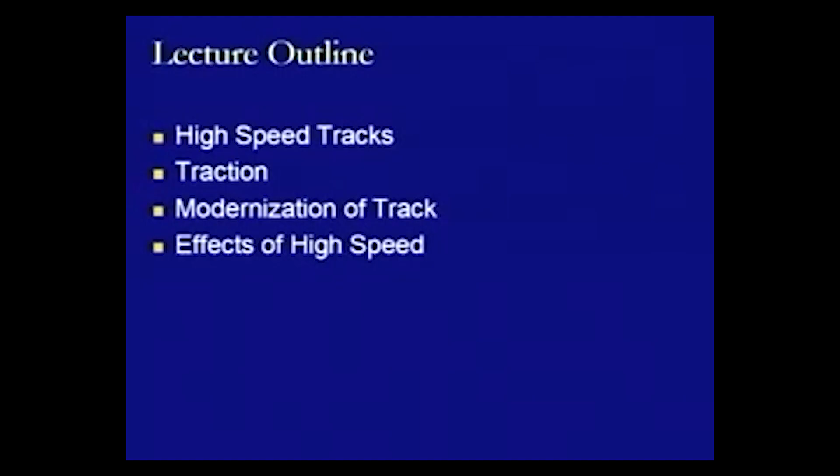We will also be looking at the different limitations which arise and limit the speed of the trains on the track. This lecture is outlined with high speed tracks, traction, modernization of track, effects of high speed, limitations on super high speeds, and further certain concepts of super high speeds.

So, we are starting with high speed tracks. These are the tracks which allow operation of trains at speeds more than 120 kilometers per hour. These are the requirements of today because there is a rapidly increasing demand of transportation. The running of heavy loads at faster speeds safely and economically is another requirement between the two major terminal stations.

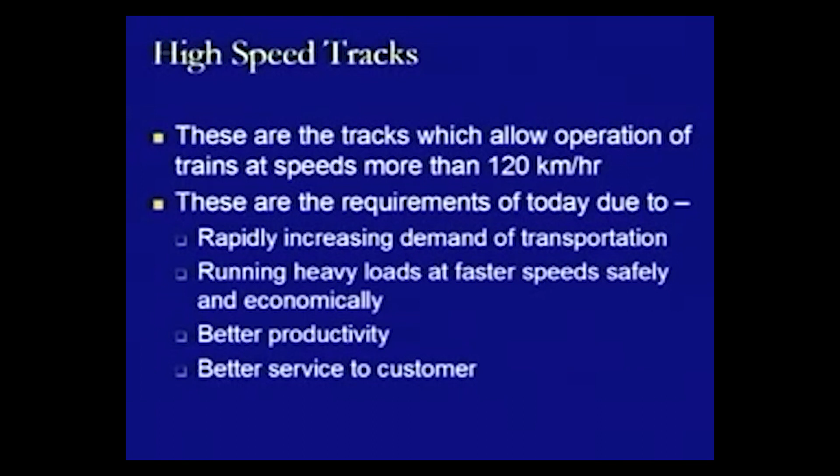It is also associated with better productivity, and it will be possible to provide better services to customers if they can be transported, or the freights can be moved, at a higher speed.

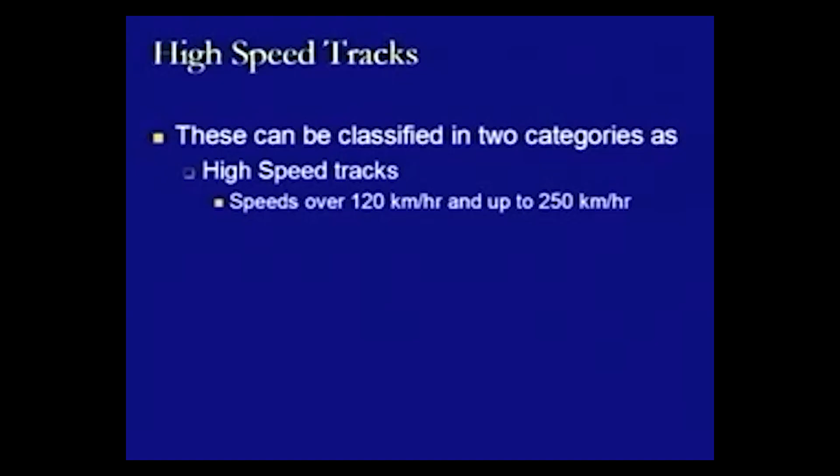High speed tracks can be classified in two categories: high speed tracks where speeds are over 120 kilometers per hour and up to 250 kilometers per hour, and super high speed tracks where speeds are above 250 kilometers per hour.

The development of high speed and super high speed tracks requires modified traction, like diesel and electric traction instead of steam traction, and the modernization of the present track to higher standards.

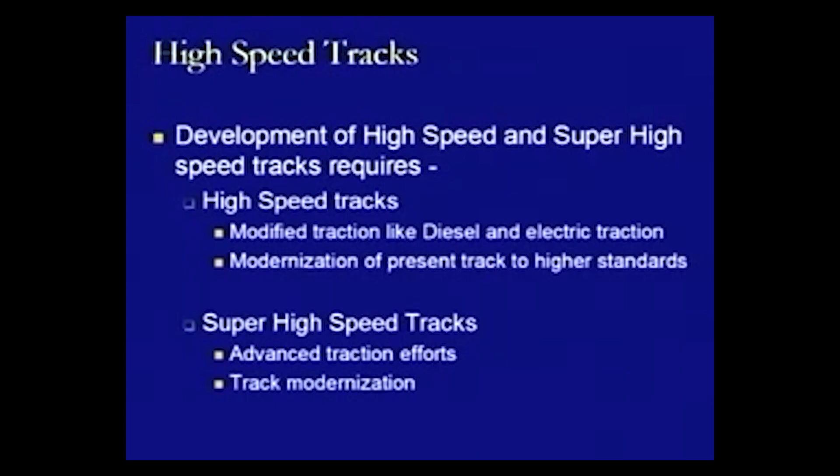In the case of super high speed tracks, we require advanced traction efforts and track modernization. So in general, it is related to traction and to the modernization of the track.

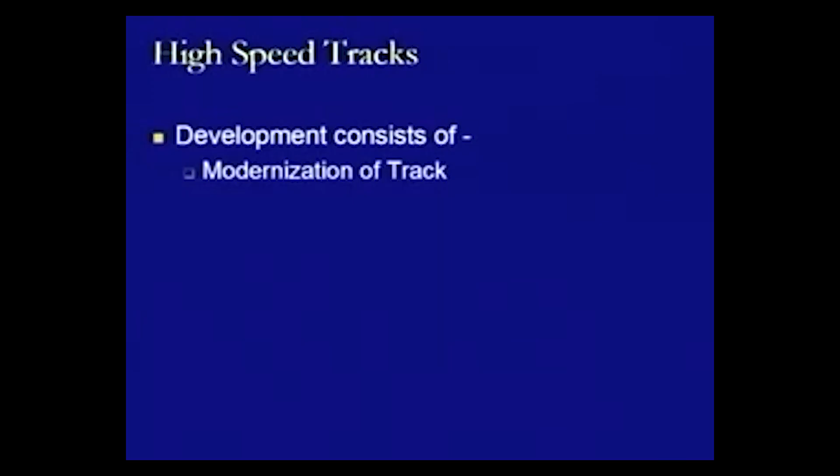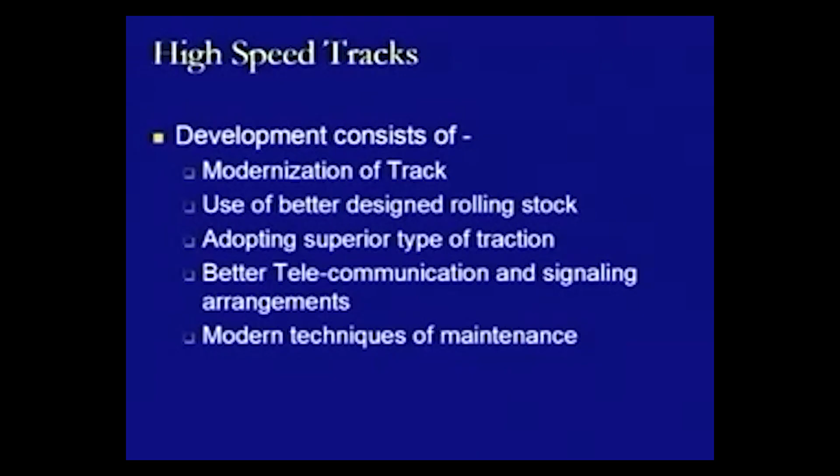In the case of high speed tracks, the development consists of the modernization of track and the use of better designed rolling stock, adopting superior type of traction, better telecommunication and signaling arrangements, and modern techniques of maintenance. These are the things which need due consideration if we are interested in developing high speed tracks.

Now, starting with these factors, first we are looking at vehicle performance with respect to high speed tracks. The requirement is that at locations in the track where defects occur, the variations in vertical and lateral loading should not reach a condition where the wheels can derail by mounting.

That is one vehicle performance requirement with respect to defects, related to variation in vertical and lateral loading conditions, where derailment should not occur due to movement or mounting of the wheels over the rails.

The variation in vertical and lateral loads should not reach a condition in which derailment can occur by distortion to track. This is another condition which needs to be satisfied.

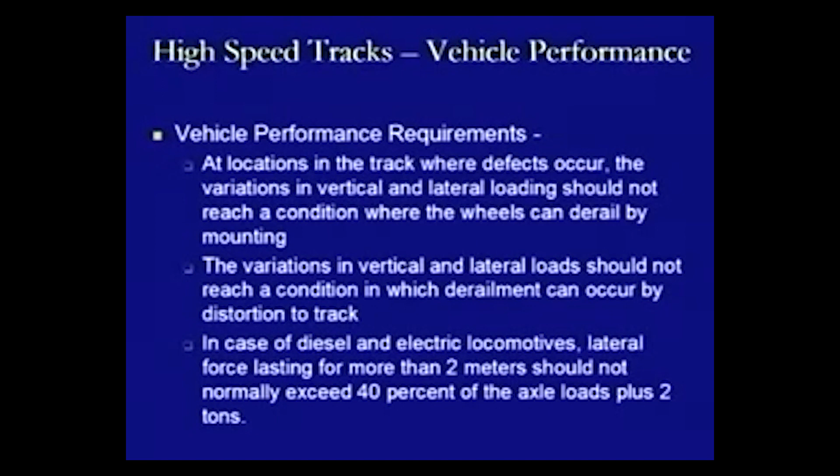In case of diesel and electric locomotives, the lateral force lasting for more than 2 meters should not normally exceed 40% of the axle load plus 2 tons. That is another limiting value with respect to the lateral force which can act for a continuation of 2 meters distance. If there is a lateral force exceeding 40% of the axle load plus 2 tons, that is a dangerous condition and should not happen.

Further, the value of acceleration recorded in the cab should be limited to 0.3g both in vertical and lateral directions for locomotives. For carriages, it is the same for vertical and lateral direction, and the peak value permitted is 0.35g. That is the amount of acceleration which can be there in the vertical and lateral directions.

The ride index should not normally be greater than 4, with 3.75 as the preferred value for locomotives, and it should not be greater than 3.5 with 3.25 as a preferred value for carriages. Passenger travel should be comfortable and goods should be carried without damage.

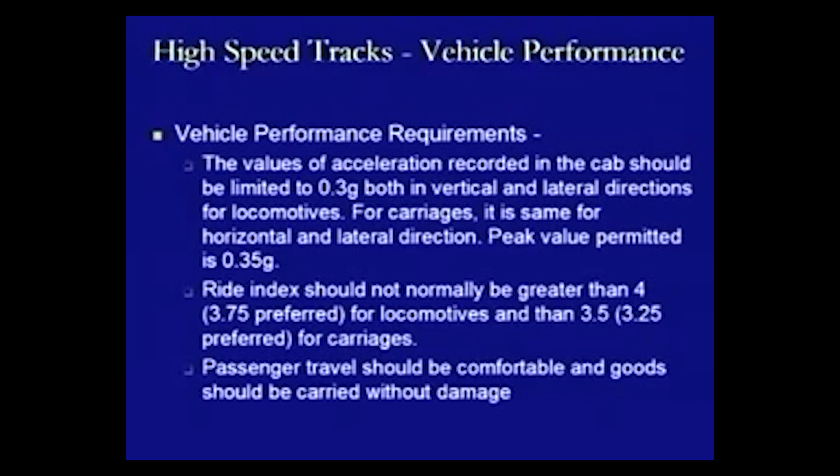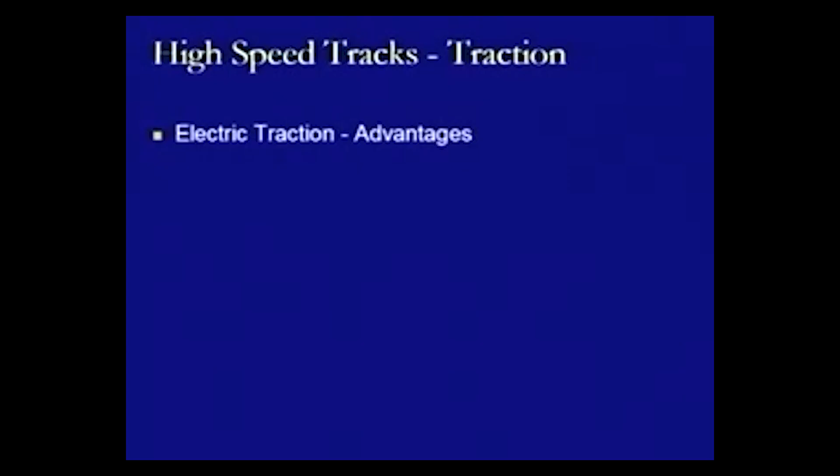Now, looking at the traction required for high speed tracks, the main advantageous traction effort is electric traction, and there are certain advantages of electric traction over the other types of traction, that is diesel traction and steam traction. We will look at those advantages.

The electric traction exerts great tractive effort as torque remains uniform. That is one of the advantages. Because of the uniformity in torque, there is more tractive effort available. The ratio of maximum tractive effort to the load on the driving wheel is 25% to 30%, meaning there is a lesser amount of resistance on the driving wheels.

The thermal efficiency is more in the case of electric traction. The transformation of energy is associated with this, and the tractive power can be increased indefinitely by increasing the number of units without affecting acceleration. This is an advantageous condition, whereas with diesel locomotives, if we have to improve the tractive power, more locomotives need to be attached, but that is not the case with electric traction. Only the units have to be placed on the same bogie combination.

The repairs and renewals are very few in electric traction. There are fewer locomotives required to handle the same traffic because they have higher tractive effort, and therefore they can move more of the load as compared to locomotives of other categories.

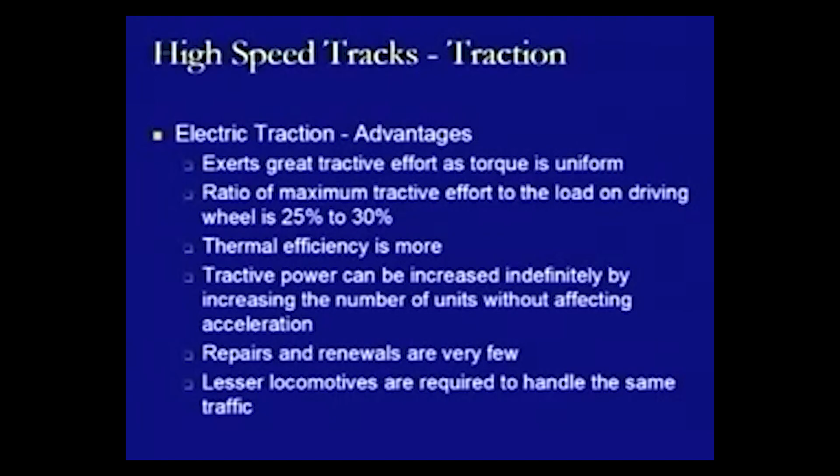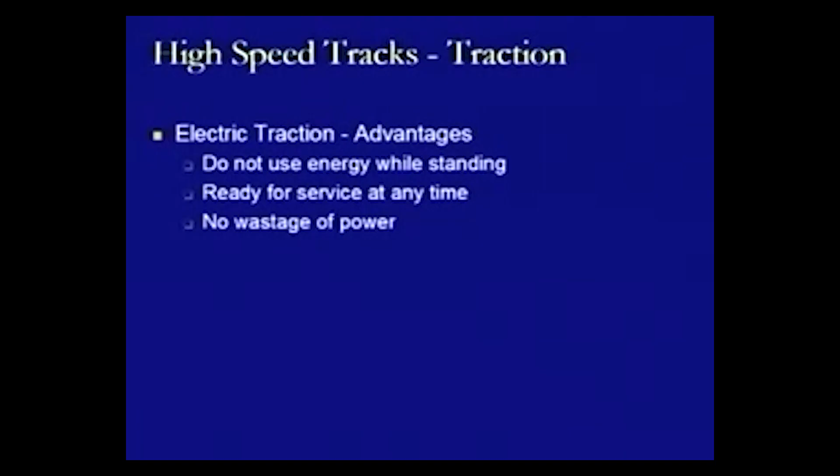Further, they do not use energy while standing, meaning they do not have to be kept in a running position while idle, which is the case with diesel engines, which need to be kept on even if not in use, so that they are ready for service at any time. Because of this, there is no wastage of power, since they do not have to be kept idle in the running condition. That is where the wastage of power would come in.

There is lesser cabin staff required in electric traction as compared to other types of driven locomotives. They can handle heavy volume at greater speeds. That is another advantageous condition.

The trains can be accelerated quickly. The maintenance of operational schedules is easy, and there is a quick turnaround because there is no reversing required in the case of electric traction locomotives.

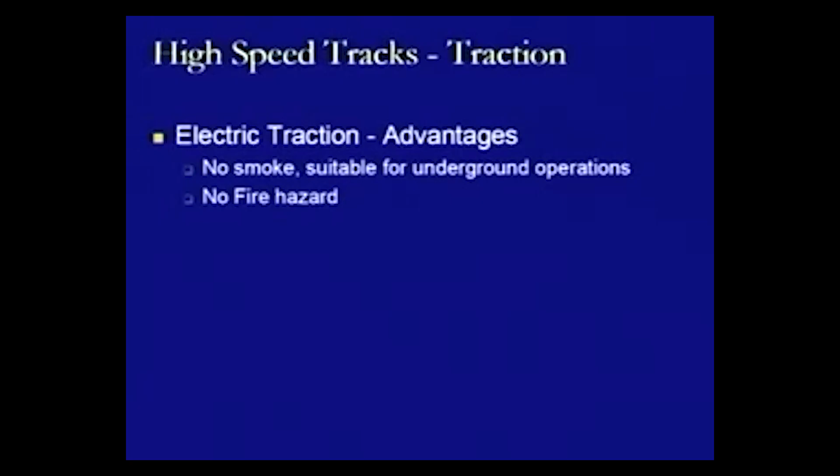Further, there is no smoke and they are therefore suitable for underground operations. There is no fire hazard. There is no wear of rails and rolling stock in the case of electric traction.

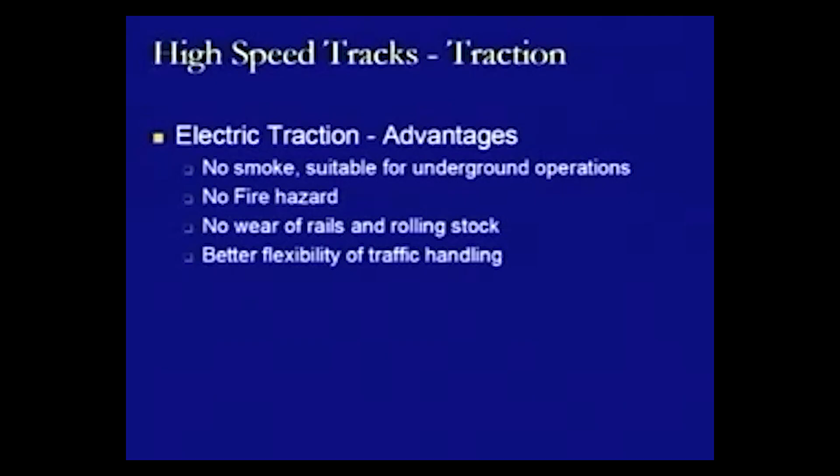There is better flexibility of traffic handling because they have higher tractive effort available, and if more traffic is to be handled, then more electric tractive power units can be installed on the same locomotive.

The regenerative braking allows moving heavy loads on downgrades without applying brakes. By this, we eliminate the wear of brake shoes, rails, rolling stock, etc. That is another advantageous condition of electric traction.

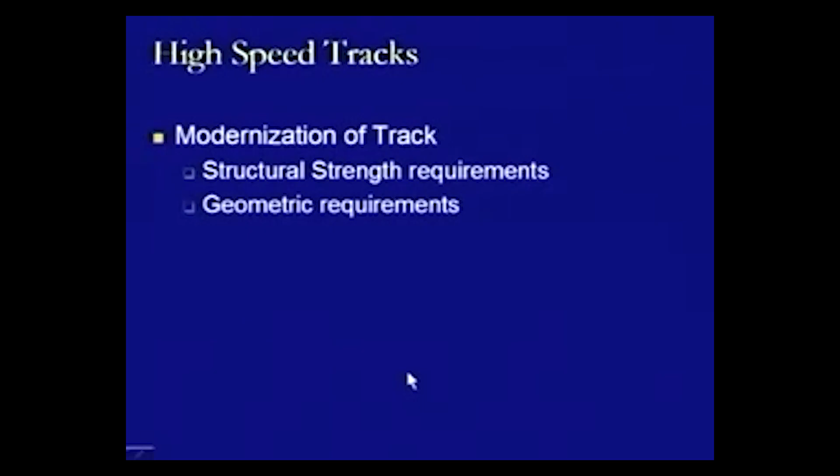So we come to another aspect of high speed tracks, that is the modernization of track. We have seen there are two aspects to be considered: one related to traction and one related to the modernization of track. Within the modernization of track, we have different requirements. One requirement is structural strength requirement, and then there is a geometric requirement. We will look at both of these requirements one by one, and the things which need to be taken care of within structural or geometric requirements.

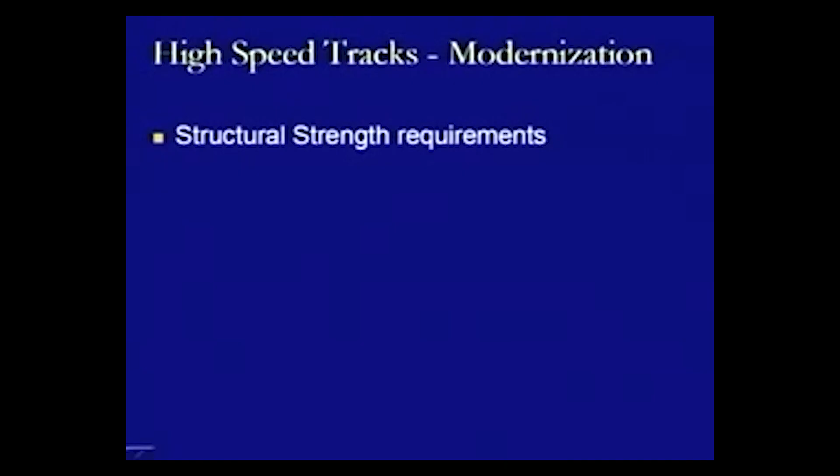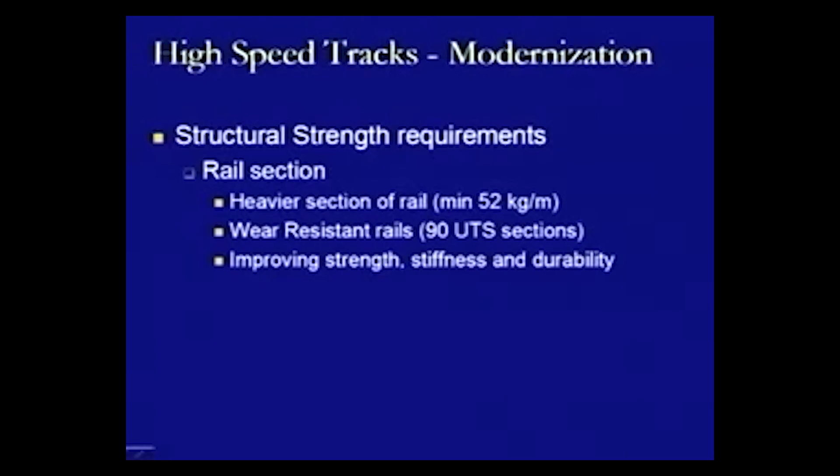In the case of structural strength requirements, it is related to the rail section, where a heavier rail section should be used, with a minimum value of 52 kg per meter. We have already seen these types of rail sections, 52 kg per meter or 60 kg per meter. Then they should be wear resistant rails, meaning we should go for 90 UTS rail sections, which have higher resistance to wear, and a hardness number much higher compared to the other conventional 72 kg per mm square UTS rail sections.

Improving strength, stiffness and durability is another important thing. Whatever ways we can improve upon the strength, stiffness and durability of the sections need to be applied to the rail sections. Further, within structural strength requirements, another aspect relates to the joints provided between rail sections.

Whatever rail sections we are using, normal joints like suspended joints will not work for high speed tracks, because of the impact produced by the higher speed at the joint. This causes a battering or hogging action at the end of the rail sections or joints.

That is why it is important to use long welded rails or continuous welded rails. These are the two recommended options, and when we use them, we can go for switch expansion joints. This is recommended for rail joints because using LWR or CWR reduces the locations where points of weakness occur.

Then, within structural strength requirements, the other component to consider is the sleeper, where the use of timber, steel and concrete sleepers with elastic fastenings is one of the possibilities.

In the case of steel sleepers, we have CST 9 to CST 13 sleepers, which are provided with special fastenings so that they can be retained in place without loosening the connection between sleeper and rail, due to the higher speeds at which the rolling stock will be moving.

Concrete sleepers should be ideally suited, as they have a greater weight, something like 3 to 4 times more than other types of sleepers, and because of their heavier sections, they have higher lateral, longitudinal and vertical stability. That is why concrete sleepers are most suitable for high speed tracks compared to other types of sleepers.

High sleeper density is required so as to have better stress distribution and greater resistance to deformation, because due to high speeds, the amount of stress transferred from top to bottom is more. Therefore, a higher sleeper density may be adopted, minimum n plus 7 for a group A line or a group B line on broad gauge track.

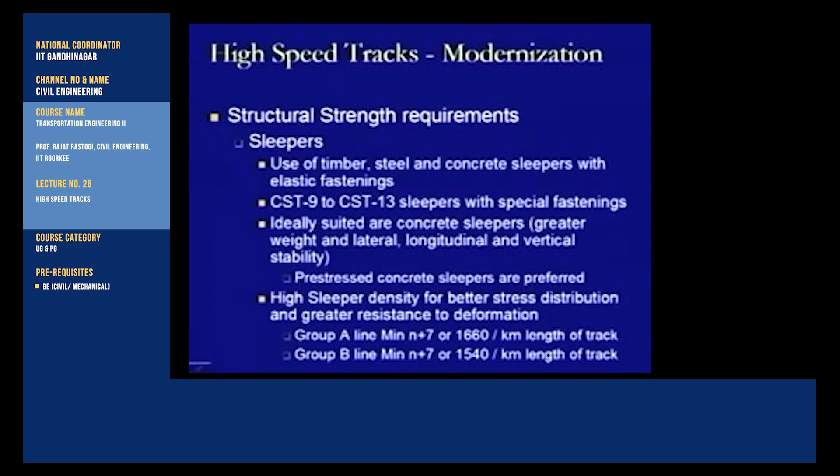This may translate to 1660 sleepers per kilometer length of track for group A condition, and 1540 per kilometer length of track for group B condition. So it is more than what we have been using previously for normal conventional tracks.

Similarly, for ballast, certain requirements apply, like adequate ballast below sleepers and at crib and shoulders with LWR or CWR tracks. We are required to provide more lateral stability to the track, and that is how we can achieve it.

The minimum cushion is 250 mm, whereas the preferable cushion is 300 mm under the sleeper. This has already been covered when we discussed ballast and the specifications of the permanent way.

Then, 250 mm ballast plus 150 mm sub-ballast with higher sleeper density is another way to improve the strength of the ballast section and the dispersal of loads or stresses transferred from the top to the formation level.

The shoulder width on the straight and inside of the curve should be a minimum of 350 mm, whereas the shoulder width on the outside of the curve should be a minimum of 500 mm. These are the desired values for the ballast overall cushion.

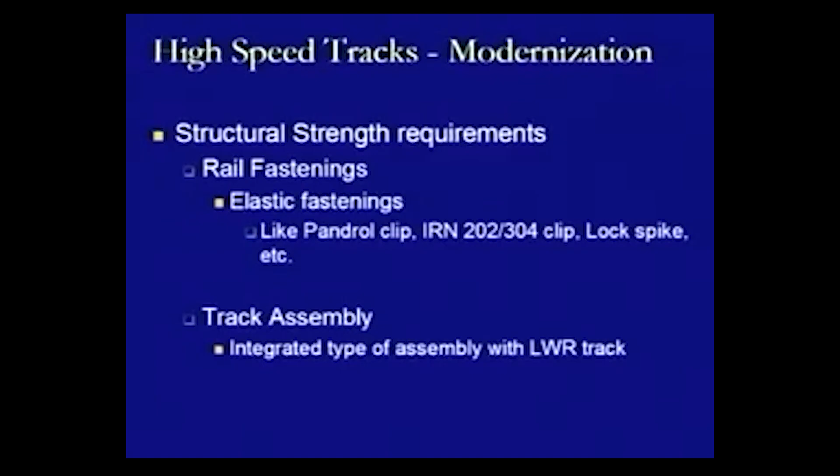Further, there are some requirements related to the formation level, the provision of a topping layer with or without a waterproofing membrane. That is one thing as far as the formation level is concerned.

Then provision of sub-bullah piles at the end of the sleepers, so that they remain intact and the material does not change its place due to reorientation and the sucking action of high speed tracks, and cement grouting of ballast pockets as well as the formation. This ensures the material remains fixed to the formation and is not removed due to the vacuum or suction effect of high speed trains.

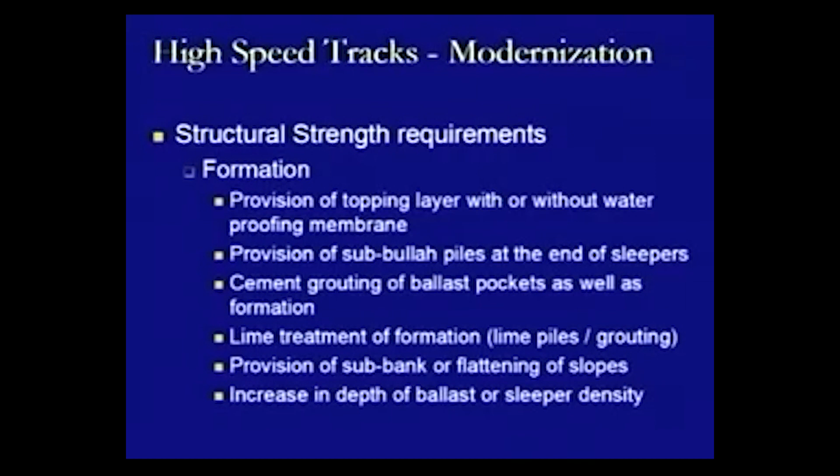Then lime treatment of the formation, such as lime piles or grouting of the formation level by lime, and provision of a sub bank or flattening of slopes, so that the chances of embankment failures are reduced. Also, increase in depth of ballast or sleeper density, so that the loads coming onto the formation are lower than its load bearing capacity.

So these were some of the requirements related to structural strength.

Then some requirements are also related to points and crossings, the locations from where change in direction of the train is allowed. As discussed in one of the earlier lectures, what we require are crossings with higher numbers, with the minimum value being 1 in 16, and the preferable being 1 in 20 or even 1 in 24.

Similar curvature for the various lead rails needs to be provided. There should not be a variation, which otherwise may cause derailment, overturning, or overrunning of the rails by the wheels. The cant deficiency and provision of super elevation is another important consideration at these locations.

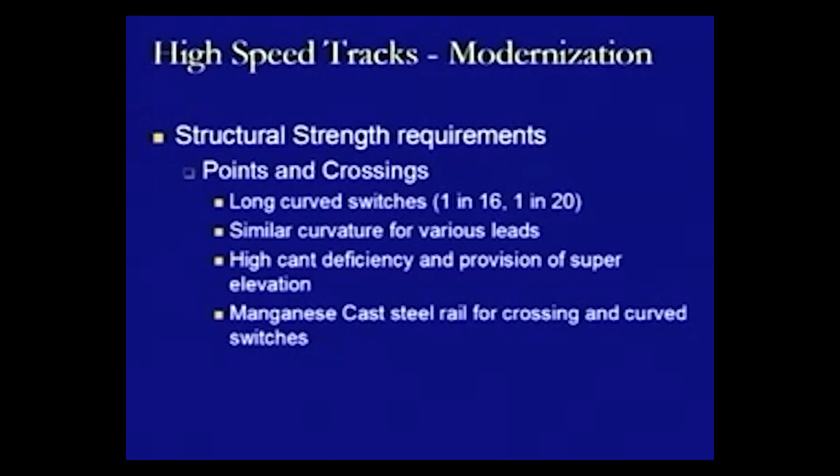Because of higher speeds, we have to look at the cant deficiency, since the same track may also be used by conventional trains where speeds are not more than 120 kilometers per hour. Manganese cast steel rails for crossings and curved switches should be used, as they offer better strength, and that is why they should be used at these locations.

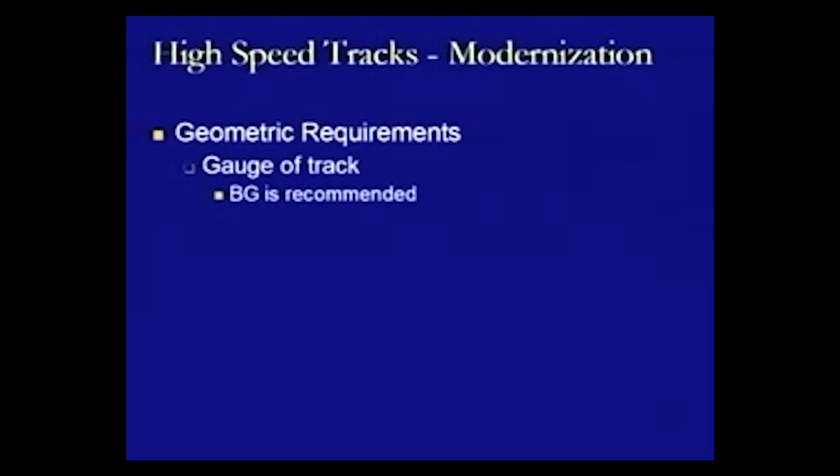Now we come to another requirement, the geometric requirement. The first aspect is related to the gauge of the track, where broad gauge is recommended. In terms of alignment, it should have flat curves, gentle gradients, and adequate cant deficiencies, so that the movement of trains over different alignments, whether horizontal or vertical, remains safe.

There are certain values given here, such as the maximum permissible speed in kilometers per hour, the degree of curve, the radius in meters, equilibrium cant in centimeters, the proposed cant in centimeters, the cant deficiency allowed in centimeters, and the length of the transition curve in meters for high speed tracks.

For a maximum speed of 160 kilometers per hour, with a degree of curve of 1 by 2, the radius is 3492 meters, with 10 centimeters equilibrium cant, proposed cant of 4 centimeters, cant deficiency of 6 centimeters, and a 48.5 meter length of transition curve.

But if the degree of curve is increased to 3 by 4, the values change: the radius becomes 2328 meters, equilibrium cant is 15 centimeters, proposed cant is 6 centimeters, cant deficiency is 9 centimeters, and the length of transition curve is 73 meters.

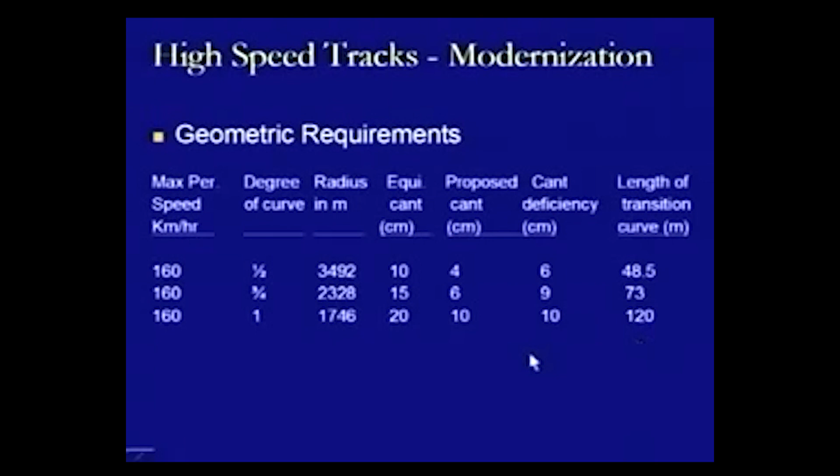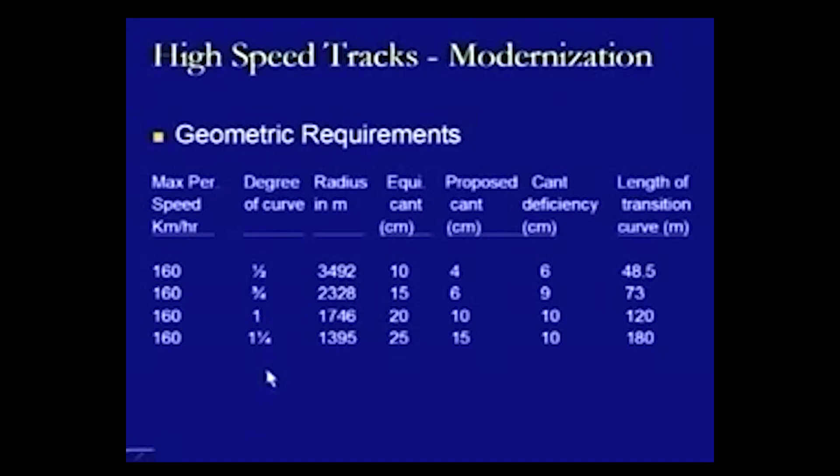Similarly, when the degree of curve is further increased to 1, there is further reduction in the radius, while the rest of the values increase, with the length of the transition curve changing from 73 meters to 120 meters. This shows, for the same speed of 160 kilometers per hour, the effect of change in the degree of curve.

The speed is computed by the formula V equals CD plus CA multiplied by R divided by 1.376, and here the speed will come in kilometers per hour, where R is the radius of the curve, CA is the actual cant being provided or super elevation, and CD is the cant deficiency. This is the same formula which we have seen previously when we discussed about the geometric standards.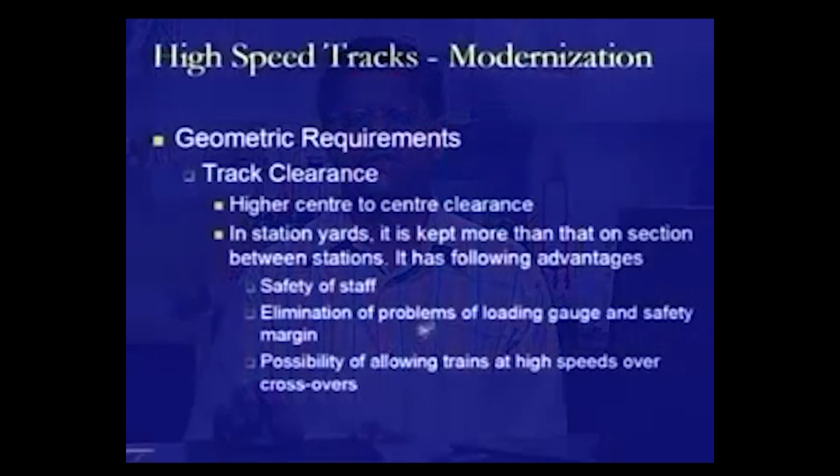There are certain track clearances which need to be provided, which we have discussed when we talked about the geometrics, the different types of track clearances and the widenings. A higher center to center clearance is required between the tracks. In station yards, it is kept more than that on section between stations. It has following advantages: it helps in maintaining the safety of staff working along the track, it eliminates the problems of loading gauge and safety margins, and there is a possibility of allowing trains at high speeds over crossovers.

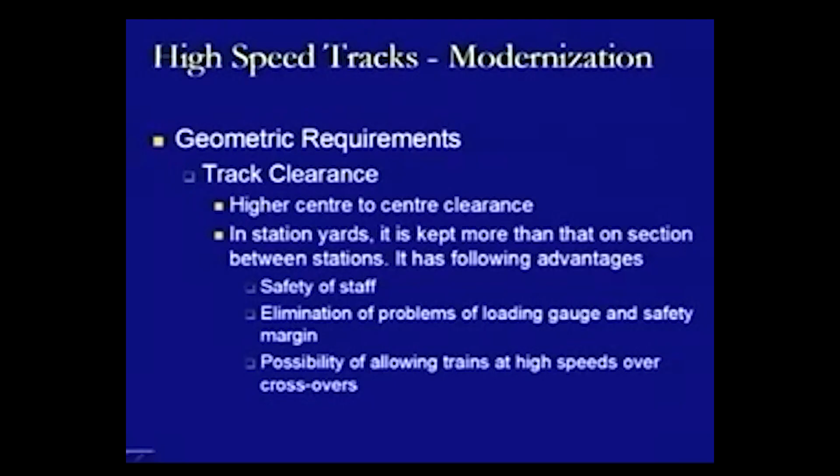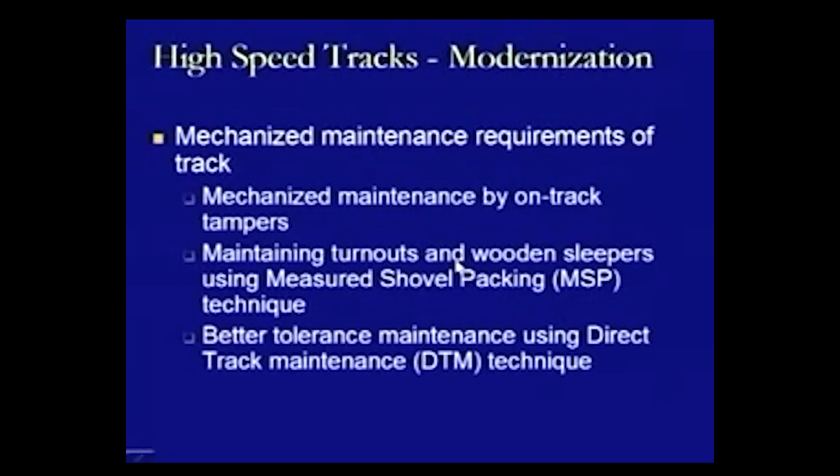Then there are mechanized maintenance requirements of the track. The mechanized maintenance by on-track tampers, maintaining turnouts and wooden sleepers using measured shovel packing technique, better tolerance maintenance using direct track maintenance technique - these are the different ways by which maintenance can be carried out. We can also use ultrasonic rail flaw detectors to minimize incidence of rail fractures, which is the non-destructive way of finding out defects, the checking of versines and curves and realigning as per the laid directions. We have discussed versines and curves when we discussed horizontal curves.

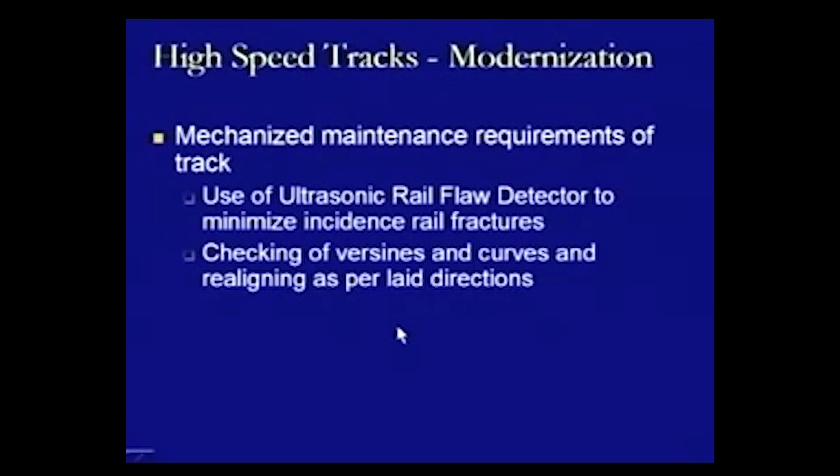Other requirements include the use of better designed all-coiled anti-telescopic ICF coaches with better springing arrangements and better braking systems, provision of universal couplers, and use of modern signaling techniques.

Then another aspect is the management information system for rails, which is the way by which we can monitor the overall operations of trains over the tracks. The use of computers for better design, management and maintenance of assets is generally a part of the rail management information system only.

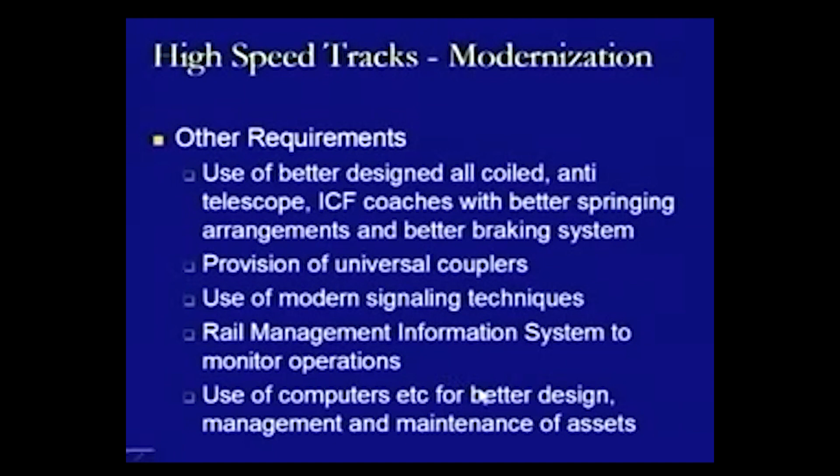So this is all about the various requirements of any high speed tracks. Now we will be starting with the various effects of high speed tracks. The track may cause track irregularities which may result in pitching, rolling, bouncing and lateral oscillations of the vehicle.

These types of oscillations of the vehicle or movements are known as parasitic movements. Pitching is in the forward direction, rolling is in the lateral direction, bouncing is in the upward direction, and lateral oscillation is in the transverse direction.

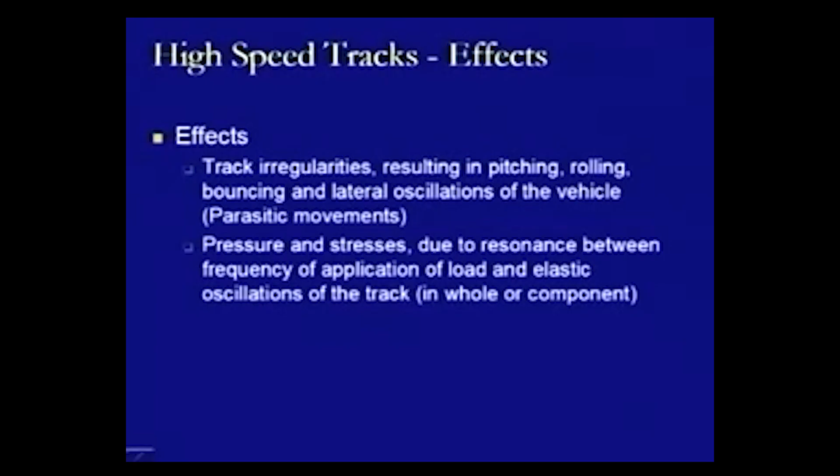Then pressure and stresses due to resonance between the frequency of application of load and elastic oscillations of the track in whole or component is another problem of high speed tracks - there is a large amount of pressure and stress because of the resonance effect of the frequencies. Stresses due to inertia or springing action of the track is another effect. Then there are unbalanced weights which need to be catered to, which may have the effect in terms of wearing of the surfaces or defects caused in the rail sections.

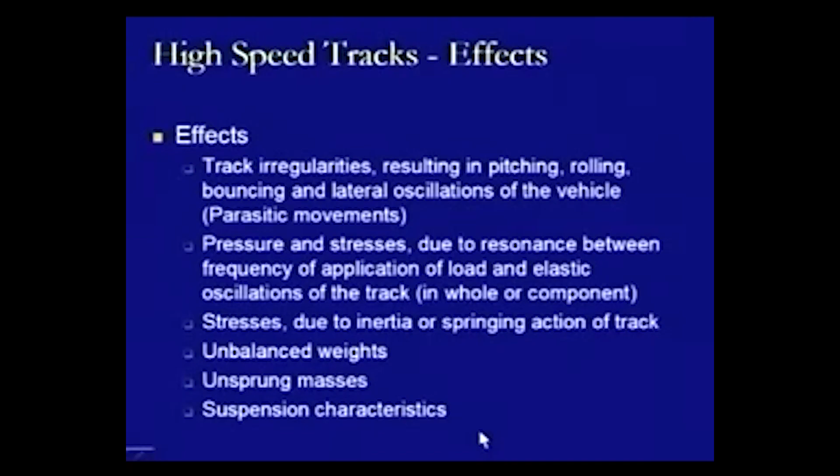Then there is unsprung mass. Unsprung masses are the conditions where we have masses which cannot be moved so as to minimize their effect in terms of negative aspects. Then suspension characteristics is another problem area of high speed tracks. If the suspension characteristics are not good, then it will create more effects, more stresses on the rails as well as the overall track when high speed trains move. Otherwise, if the suspension characteristics are okay, then there will not be any such problem.

Now, once we have seen the various effects of high speed tracks, the next thing we can look at is certain limitations associated with super high speed. What we are interested in looking at here is the reasons which may create an effect in restricting the overall speed of the track, and where those limitations are coming from.

Some of the important limitations are the formation of the wave on the rail sections, as we have seen in the case of the creep theory of the rail, where there was a wave formation theory, and the wave is forming and moving in the longitudinal direction forward with the movement of the wheels, inducing the creep. That is the same type of wave formation condition here, but how it limits the speed will be seen.

Then there is adhesion between the wheels and the rails, that is another factor. There is a certain amount of friction which always remains between the wheels and the rails, and that is how the two things remain in adhesion with each other, there is no separation between them. So, that is another aspect which limits the speed.

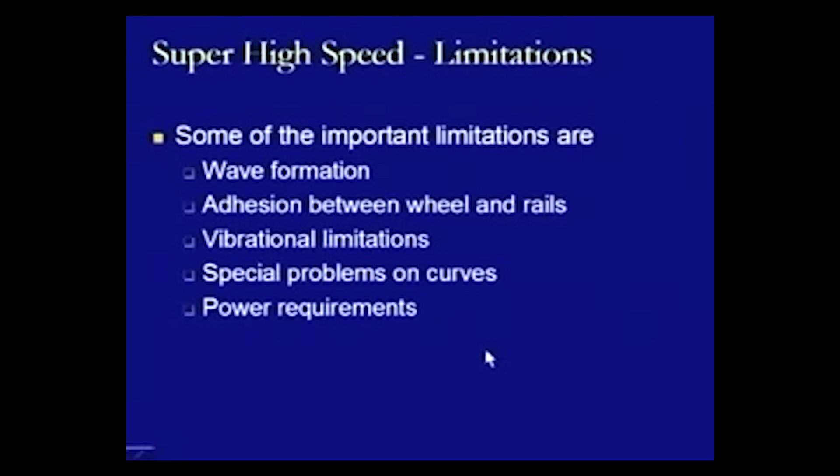Then there are vibrational limitations, how the vibrations are induced and how they limit speed, we will be looking at this one. Then special problems on the curves, specifically related to the provision of cant and the centrifugal force. Then the power requirements for super high speed is another important area which limits the overall speed of the movement.

So, we will be looking at all these limitations one by one, and we will start with the first one, that is the wave formation. In the case of wave formation, what happens is that there is a propagation velocity of wave in a medium, and it sets the limit to the speed of a body moving in a medium. That is the concept of the wave formation condition.

As we have seen in the case of creep of rails, as soon as there is a load coming on top of the rail through the wheels, there will be a deflection at that point. Due to the rigidity of the rail mass, this downward deflection will cause the uplifting of the rail section forward and backward of the wheel than normal condition, and that is the sort of wave which gets induced at that location. Now, as the wheel moves forward, this condition also moves forward. That is what is a wave moving in the rail medium.

Now, there can be a propagation velocity for this wave in the medium, here the material of the rail, and there is a certain limitation on this propagation velocity based on the characteristics of the material used in that medium. Here it is rails, and that is from where the speed limits come for a body which moves within a medium, because there are certain resistances offered by the medium to the movement, and with respect to those resistances we have to identify what is going to be the maximum speed.

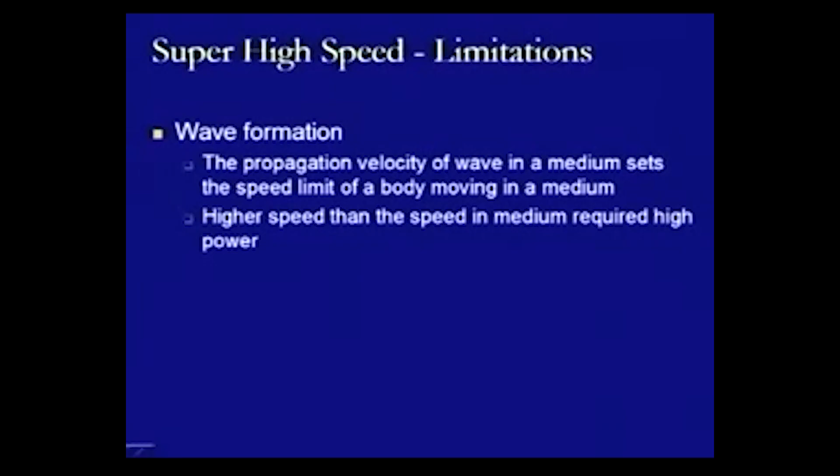Higher speed than the speed in medium requires higher power. So, that is one thing. If we are interested in getting a higher speed than the speed in medium, then it will require a higher power condition. We have to provide more power to this type of system.

Now, as the vehicle speed increases in the tracks and approaches the velocity of wave propagation in the rail, an extraordinary resistance comes into play. This means both the wave propagation velocity and the track velocity come into combination with each other, equal to each other, then resistance comes in, and in this case the rail deflects under the wheel. So, this is the case which tries to limit it, and the wheel is accompanied by large amplitude stationary waves which can eventually destroy the rail.

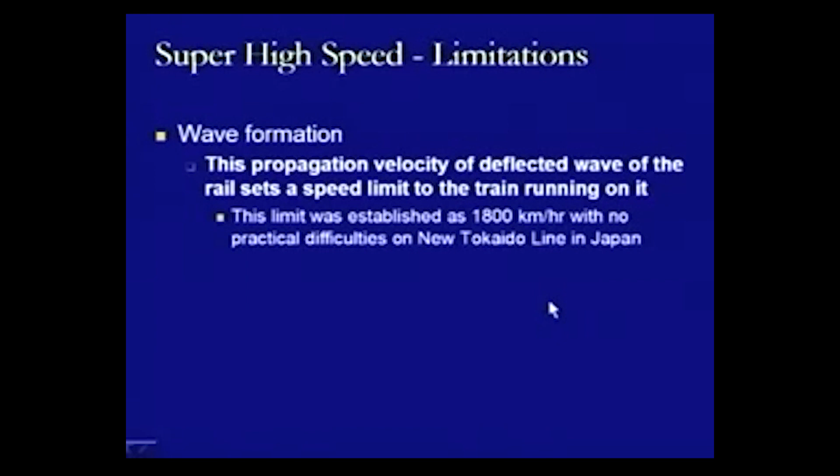So, this propagation velocity of a deflected wave of the rail sets a speed limit to the train running on it, and this limit was established as 1800 km per hour with no practical difficulties on the New Tokaido line in Japan. That is the maximum speed which was practically and experimentally found out, which can be achieved, and that is obviously going to be dependent on the material characteristics.

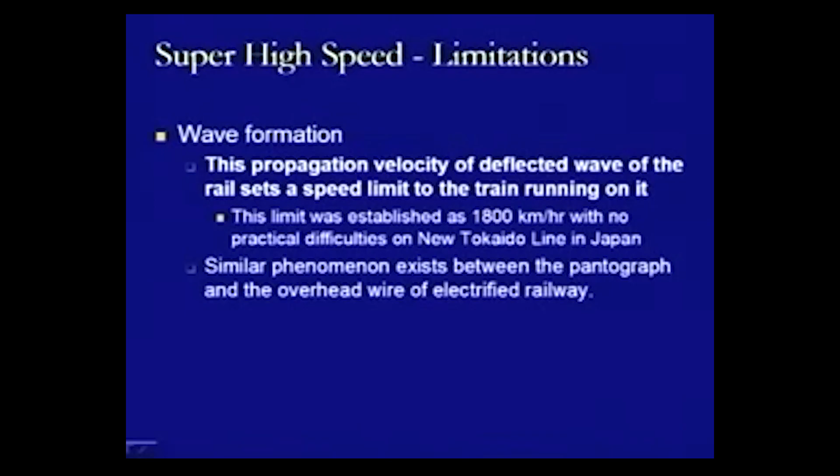The similar phenomena exists between the pantograph and the overhead wire of electrified railway. In electrified railway, the locomotive is provided with a pantograph which is made to move up and down so as to take current from the overhead wires. Here, when there is a continuous connectivity action between the pantograph and the overhead wire, a sort of frequency and wave propagation also takes place in these cases. The pantograph deflects the overhead wire at the point of contact, thus causing wave formation in it.

So once this wave is being formed, if the speed of the pantograph exceeds the propagation velocity of the transverse wave in the wire, a rapid growth of amplitude may destroy the overhead wire system. So this is the basis for limiting the speed.

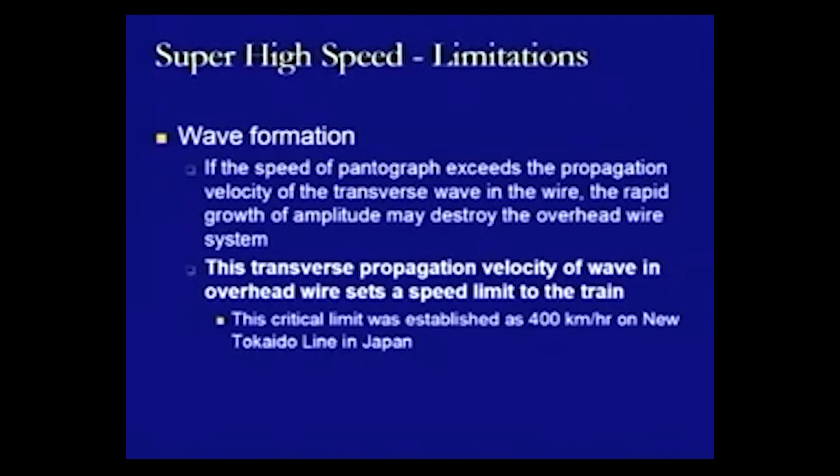If the pantograph speed increases and becomes more than the speed of the transverse wave, the amplitude may cause failure of the overhead wire system. This transverse propagation velocity of wave in the overhead wire sets a speed limit to the train, and this critical limit is established as 400 kilometers per hour on the same New Tokaido line in Japan.

So we see the value comes out to be 400 kilometers per hour in the case of electrified tracks. The speed can be increased by increasing the tension in the overhead wire or by developing a lighter wire material. These are the two ways by which we can improve the speed, but we cannot increase the tension in the overhead wire to a very high value, which may cause the breaking of the wires.

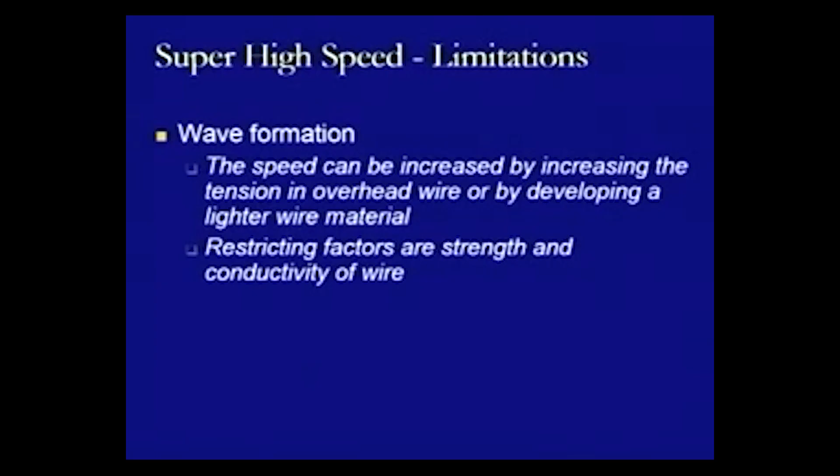Developing a lighter wire material is part of research, and the work is still going on in this aspect. The restricting factors here are the strength and the conductivity of the wire, which may allow the propagation of the wave at a certain velocity.

Another aspect is the adhesion between the wheels and the rails. In this case, the tractive force works as a reaction of the rail due to adhesion between wheel and rail. We have already understood this before, and this adhesion force tends to decrease with the increase in speed, because that is related to the frictional force.

But the train resistance increases approximately with the square of the speed, which we have already discussed and computed when we talked about train resistances, where it was varying in terms of W v square.

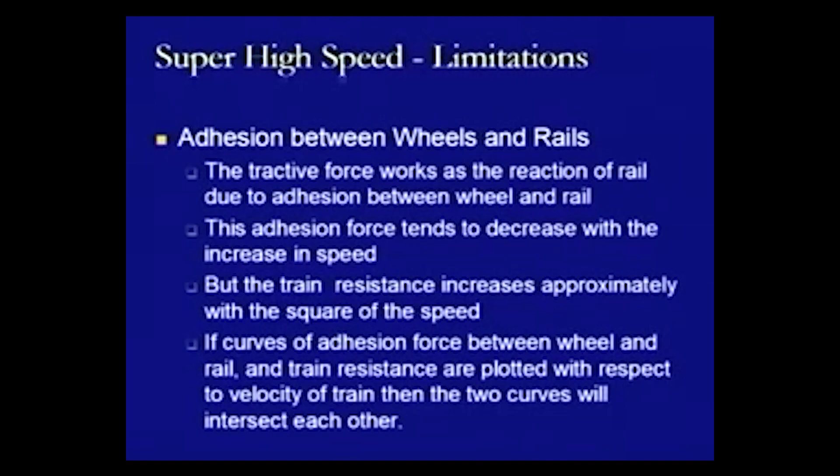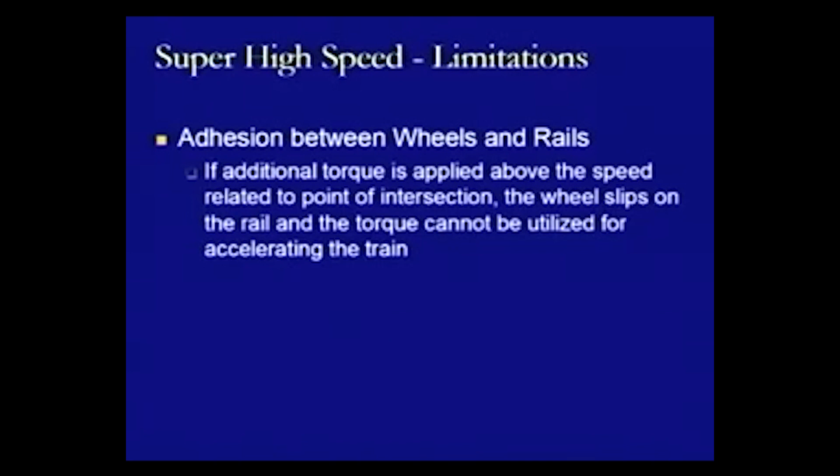If curves of adhesion force between wheel and rail, and train resistance, are plotted with respect to velocity of the train, the two curves will intersect each other. If additional torque is applied above the speed related to the point of intersection, the wheel slips on the rail and the torque cannot be utilized for accelerating the train. That is the limiting condition in the case of adhesion between wheels and rails. Whatever torque you improve upon and provide beyond this point will not be utilized to accelerate the train, and therefore the speed of the train cannot be increased further after this point.

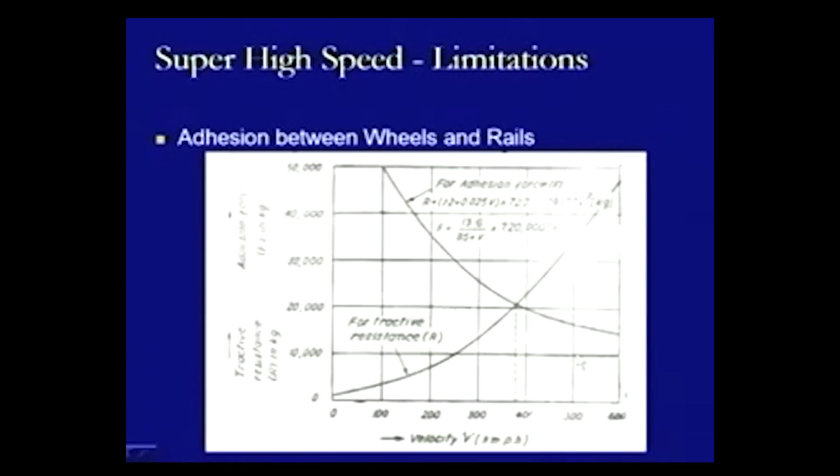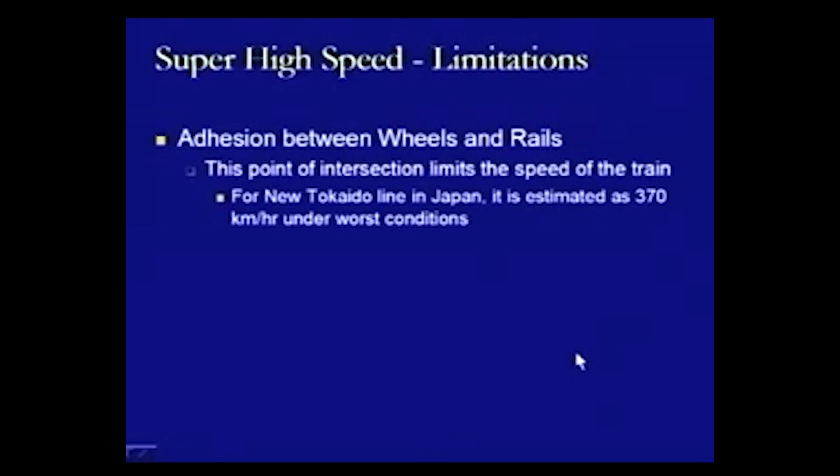So this point of intersection limits the speed of the train, and in the case of the New Tokaido line in Japan, it was estimated as 370 kilometers per hour under the worst conditions. So the train speed here, where the adhesion between rails and wheels has been talked about, can be increased by reducing the train resistance.

There are innovative techniques like use of linear induction motor or jet propulsion, etc., which are new concepts for increasing super high speeds. Raising the adhesion between the rails and the wheels is another way, and for this we require the development of new material superior to steel, so that better adhesion can be achieved.

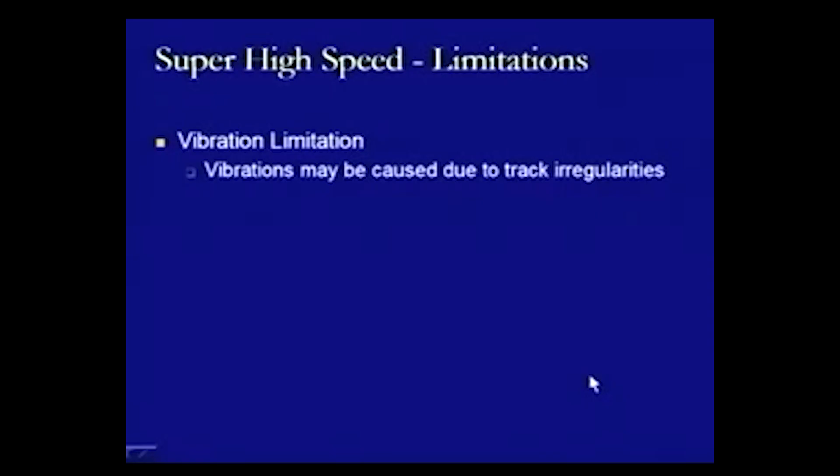Then there are vibration limitations. The vibrations may be caused due to track irregularities, and they grow with the speed. Also, there are unstable self-excited vibrations in rail vehicles even if the rail is geometrically straight.

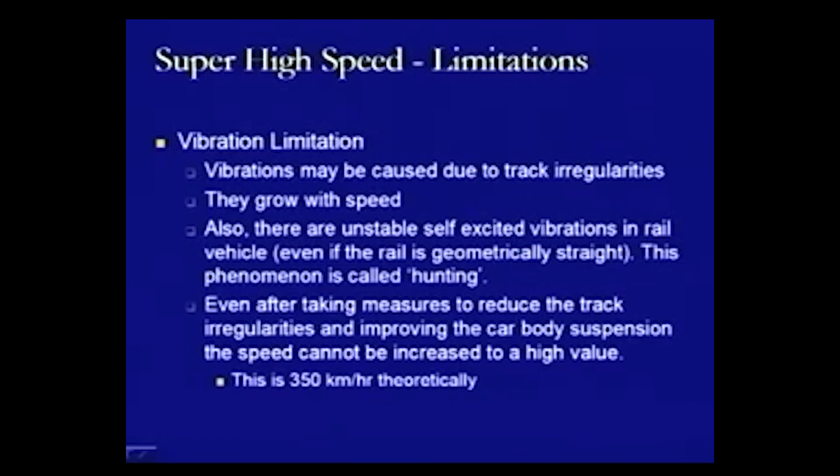This phenomenon is called hunting. And even after taking measures to reduce the track irregularities and improving the car body suspension system, the speed cannot be increased to a high value, and theoretically this value is found to be 350 kilometers per hour. So by looking at the different aspects so far, this value is the minimum value, which comes out to be 350 kilometers per hour.

In this case, where we can limit the vibrations and the effect of vibrations, the train speed can be increased only if we make the train float a little above the track. That is where the effect of the track irregularities or the geometrics will be removed, and the resistances will also become lesser from the track, and therefore the speeds can be increased to a much higher value. That is the concept of all the new techniques.

Then there are some special problems on curved tracks, like the unequal wheel loads on inner and outer rails, which influences the safety of the vehicle.

The provision of super elevation on the outer rail counteracts the centrifugal force. What happens is that there is an indiscriminate increase which may cause uneasy feeling to the passengers or may cause the vehicle to overturn, because there is very high super elevation to be provided.

Experiments on the new Tokaido line in Japan established that maximum lateral acceleration of 0.05 centimeters per second squared does not cause much discomfort and results in 180 mm of cant. So that is the maximum value of cant which can be provided, 180 mm.

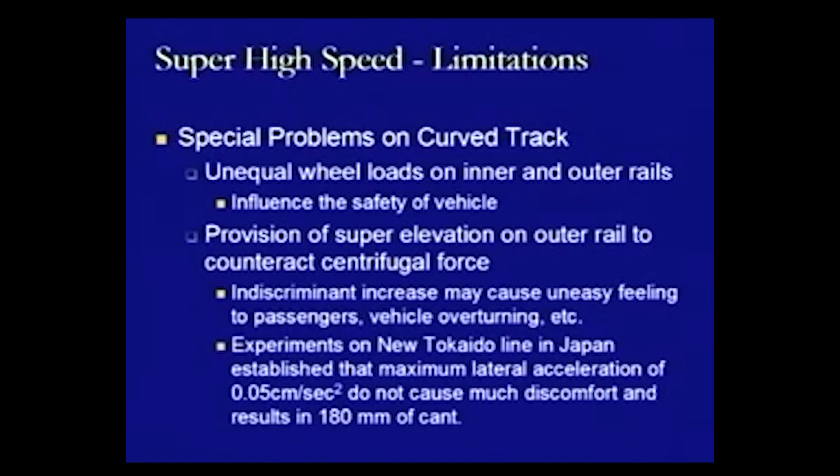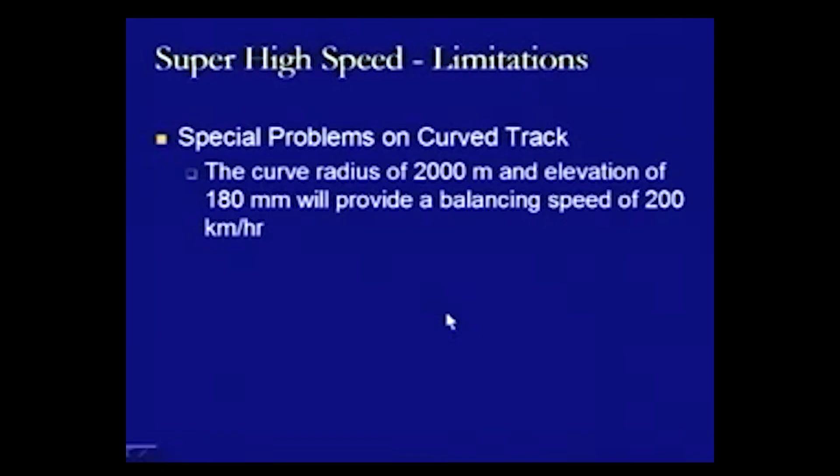Further, the curve radius of 2000 meters and elevation of 180 mm will provide a balancing speed of 200 kilometers per hour. So the value on the curved track reduces to this value. Wherever the curves are provided, the speed is to be restricted. In these cases, the train speed can be increased by increasing the radius of the curve.

Now we come to the other aspect of super high speed, that is the power and the power requirements. There is a specific power defined as the power required to move 1 ton of passenger rolling stock, which is correlated with air resistance, grade resistance, speed and acceleration resistances, etc. It is observed that with the increase in speed, the requirement of power to overcome resistance and to accelerate the train goes up very steeply.

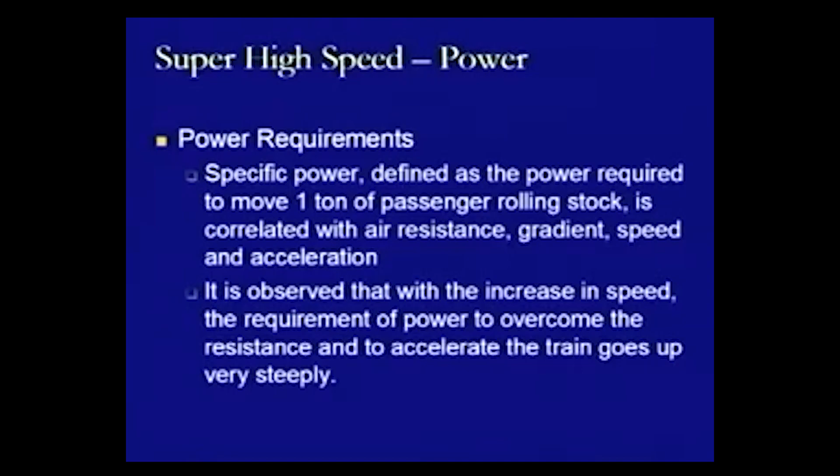This is already seen when we talked about the hauling power requirement of a locomotive, which is directly related to the resistances offered by the track. The tests indicate that at a speed of 300 kilometers per hour, the air resistance takes about 95% of the traction power, and only 5% of the power is devoted to suspension and guidance. So that is the amount of power taken by the resistances, and is available. The rest of the power which is available is very little for the guidance system.

Therefore, steel wheels on rails offer the greatest economy for a given speed.

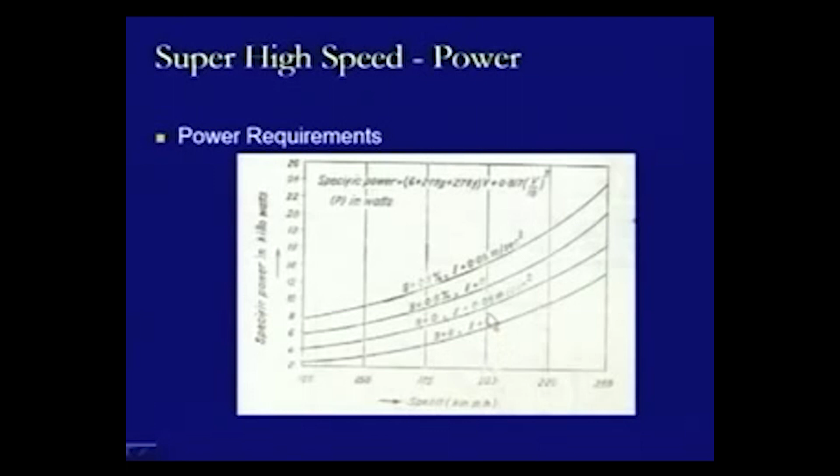This is a diagram which tries to define the relation between the specific power in kilowatts and the speed for different values of g, the grades, and different values of f, in meters per second squared, which is the acceleration. We have the specific power equation by which we can find out the power. So the correlation we see is that as the speed increases for the same value of g, the specific power increases. If the value of f changes, or for the same value of f the g value changes, then also the specific power increases, but that increase is at a higher rate compared to the change in the value of f.

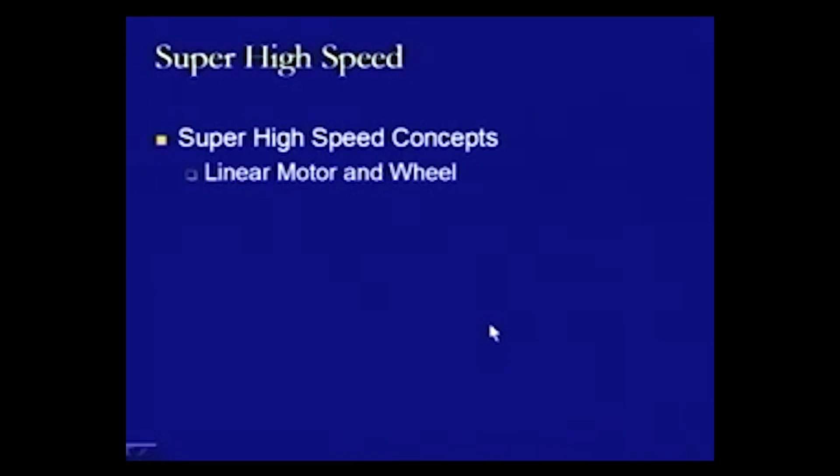Now we come to the super high speed concepts, how we can attain the super high speeds. There are different ways: the linear motor and wheel case, the linear motor and air cushioned vehicles, gas turbine and air cushioned vehicles which are jet propulsion vehicles, and magnetic levitation vehicles. We will be looking at some of these concepts.

The linear induction motor is one which helps in attaining very high speeds. The thrust is produced without physical contact, so it can be used with any type of guidance system, and this is free from friction and can take speed as high as 350 kilometers per hour. It provides thrust from the backward direction by using the air.

Then the linear induction and air cushion method, this combination offers a super high speed of up to 500 kilometers per hour, where the vehicle moves over the air cushion, thereby reducing the resistance offered by the track. Due to this reduction in resistance, the speed increases from 350 to 500 kilometers per hour.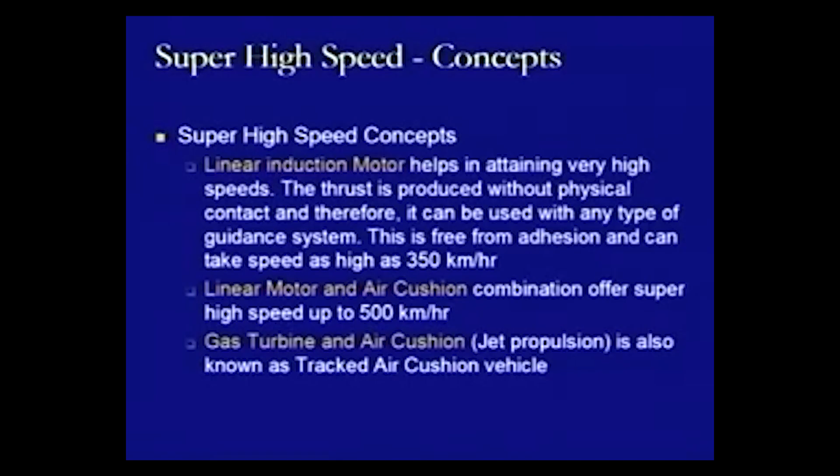Then in the case of gas turbine and air cushion, or jet propulsion system, which is also known as tracked air cushioned vehicle system, a gas turbine is provided instead of the linear induction motor, and with the help of this gas turbine we try to achieve higher speeds.

This is one of the graphs which tries to define the efficiency of all these air cushioned vehicles, ACVs. Here the correlation is shown with respect to speed on the x-axis and propulsive efficiency in percent on the y-axis.

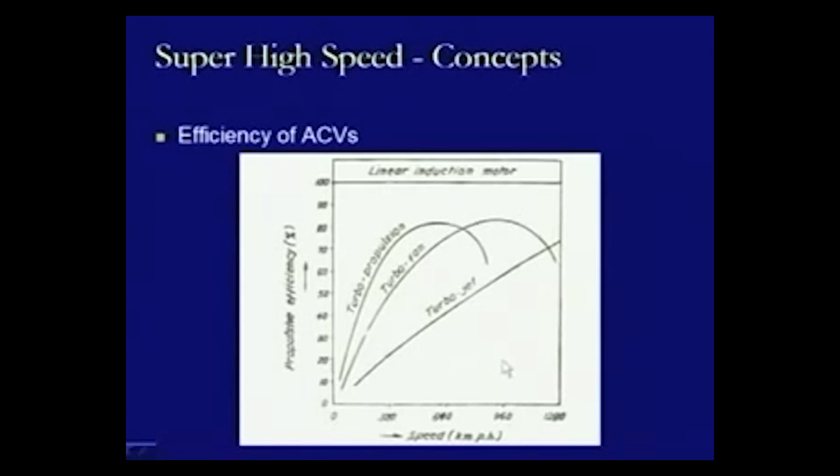In the case of a linear induction motor, it is at 100% and stays constant, meaning whatever the speed, the propulsive efficiency remains constant. Whereas in the case of turbojet, turbofan, or turbo propulsion, the values change, and we find that almost the same amount of value is achieved with turbofan or turbo propulsion, but at a higher speed. So that is the comparison between the three types of propulsive systems which can be provided on air cushioned vehicles.

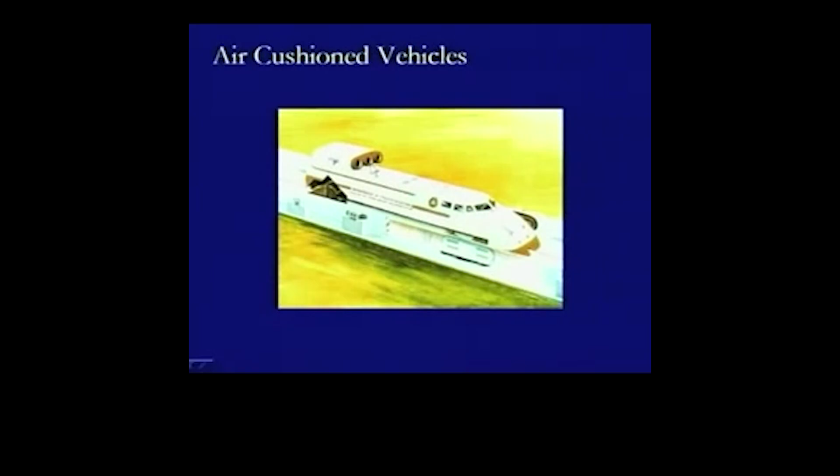This is a photograph of an air cushioned vehicle, moving in this direction with the provided aerodynamic profile. This is the place where the thrust or propulsive condition is created, by which the thrust goes in the backward direction and the vehicle moves forward, guided by the guidance systems provided on the two sides.

So we can see this brown colored oval shaped condition, and here the white based oval shaped condition. These are the cushions which have been provided, which work as a guidance system for this vehicle to move within this track, so that if there is any lateral movement, it comes back to the normal average condition of the track.

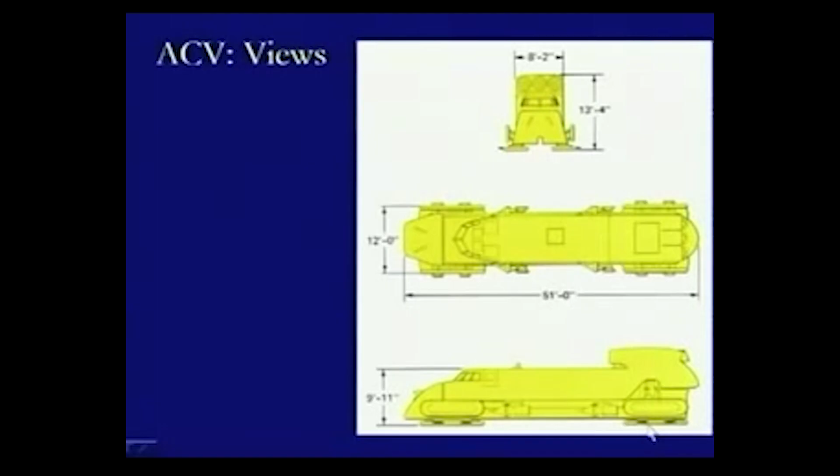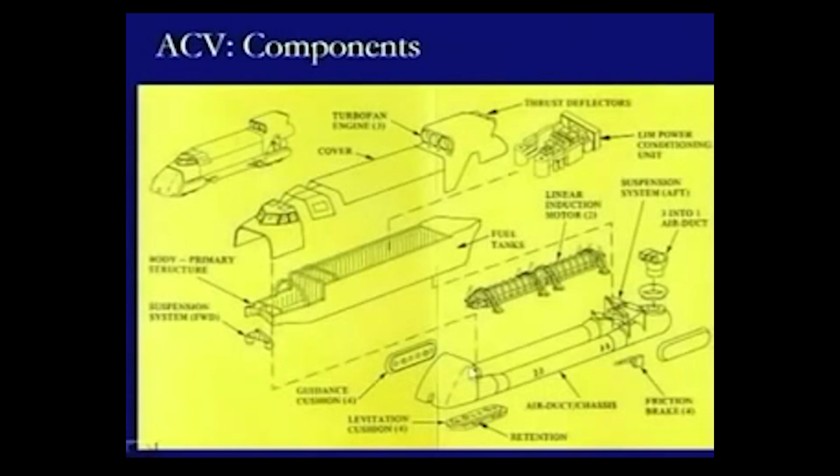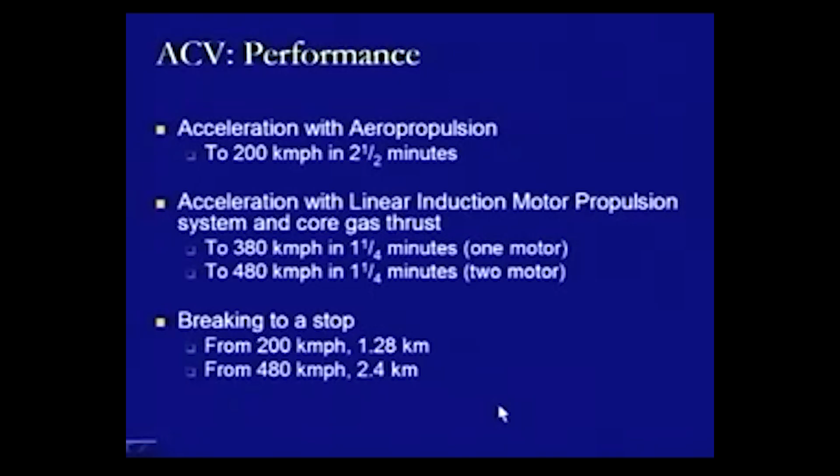Braking to a stop from a speed of 200 kilometers per hour takes within 1.28 kilometers, and from a speed of 480 kilometers per hour it can be brought to a stop within a distance of 2.4 kilometers.

Another system used for super high speed is magnetic levitation, known in short as maglev. This is one of the costly systems which uses magnetic forces for propulsion as well as support, guidance and control, and it is generally used only as a design feature. But now China is implementing this to provide connectivity from the airports to the Olympic game village, and travel will be through this magnetic levitation system.

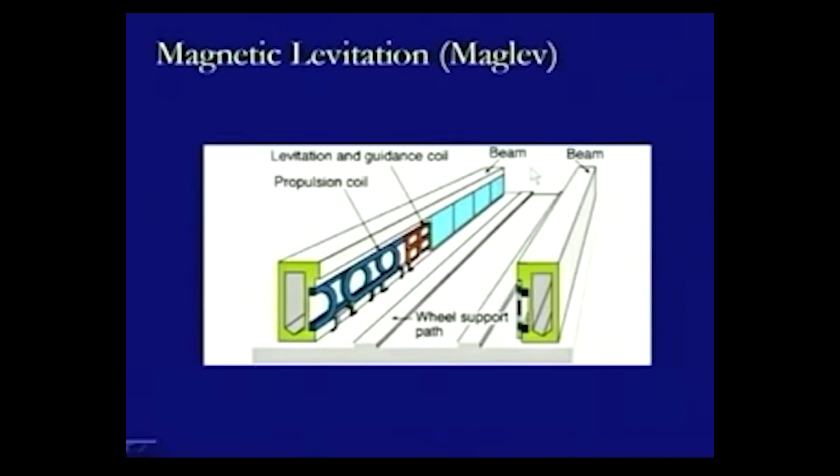So we use this propulsion coil and the levitation and guidance coil for the movement of the vehicle over these support paths. As soon as it reaches higher speed, it gets lifted from the base and moves into the air, so there will be some gap between the track and the base of the vehicle.

The passing of the superconducting magnets by figure-8 levitation coils on the side of the track induces a current in the coil and creates a magnetic field. This pushes the train upward so that it can levitate 10 centimeters above the track.

So in the very beginning, we pass the current, and due to these superconducting magnets, the current comes into the coils and the magnetic field gets set, which helps in rising the overall structure of the train 10 centimeters above the track. This is the very first condition which gets created.

Now, the train does not levitate until it reaches 80 kilometers per hour, so it is equipped with retractable wheels. This is another condition here, that it does not levitate unless it reaches a speed of 80 kilometers per hour, so it has to be provided with wheels so it can move on them until it reaches that speed.

This is the system working here. This is the vehicle moving on these two guidance paths or wheel paths. It is provided with a superconductive coil on this side as well as a superconductive coil on this side. This one is working as a north pole and this one as a south pole, and this is the 8 structure which is the levitation and guidance superconducting coil.

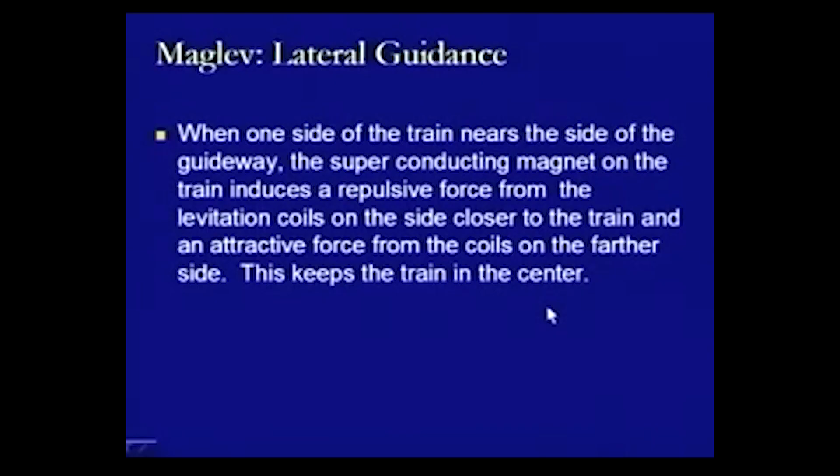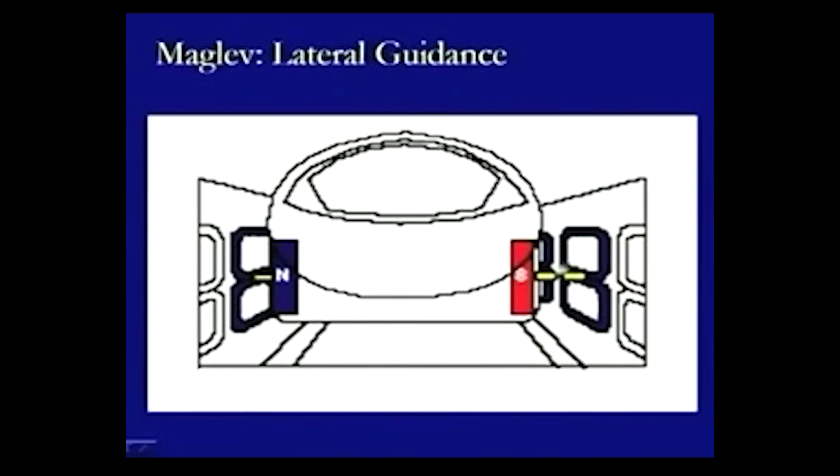So what is happening here is that the train has shifted towards this side. This whole coil will become north pole and this is north pole, so there will be a repulsion here, while this also becomes north pole and this is a south pole, so there will be an attraction in this one. So it will try to shift to this side, and as soon as it reaches the same condition as we saw in the previous diagram, it will be centered.

Similarly, we are talking about propulsion in this case. Alternate current is run through electromagnetic coils on the guide walls of the guideway, and this creates a magnetic field that attracts and repels the superconducting magnets on the train and propels it forward. Braking is accomplished by sending an alternate current in the reverse direction. That is how it is accelerated or decelerated.

This is what is being shown here - the vehicle is moving in this direction, and these are two superconducting magnets on this side. This shows north pole, this is south, and opposite to this, south and north. Then these are the propulsive superconducting magnets. With respect to this north, this is south, so it is attracting. Similarly, for this south there is a north, this is attracting, and with the help of this attraction it moves in the forward direction. The amount of attraction is so heavy that it can achieve a very high speed.

This train uses superconducting electric magnets, and these magnets are cooled by liquid helium or liquid nitrogen. This means that once electrified, these magnets do not require additional energy. This is another important thing - as soon as they get electrified, no additional energy is required to operate the system.

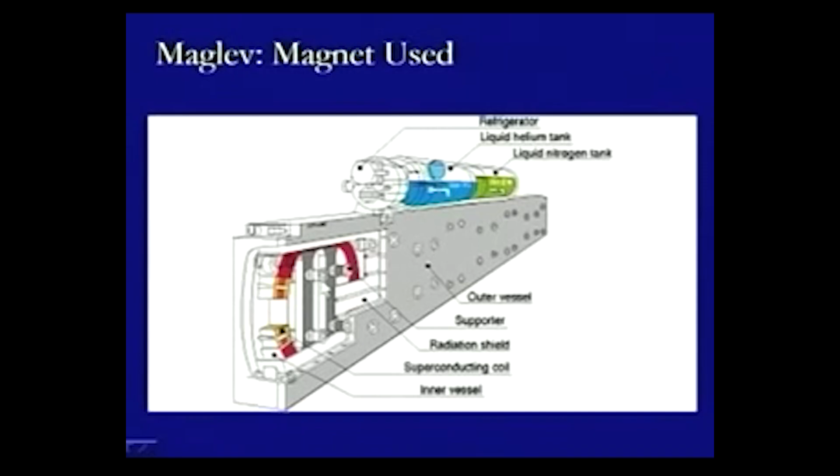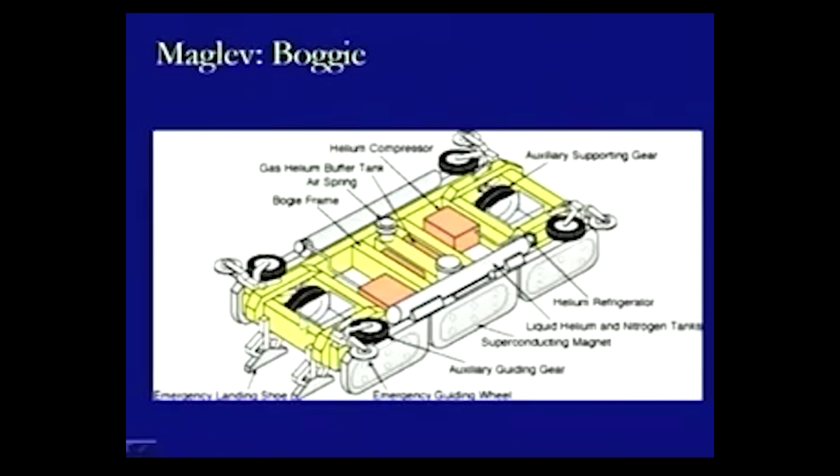So what we have discussed in today's lecture is how we can attain high speeds or super high speeds, and what are the concepts and limitations in achieving those super high speeds. This means we require more research in the area of materials to improve upon and reduce the limitations by which the speed of the track is being limited.